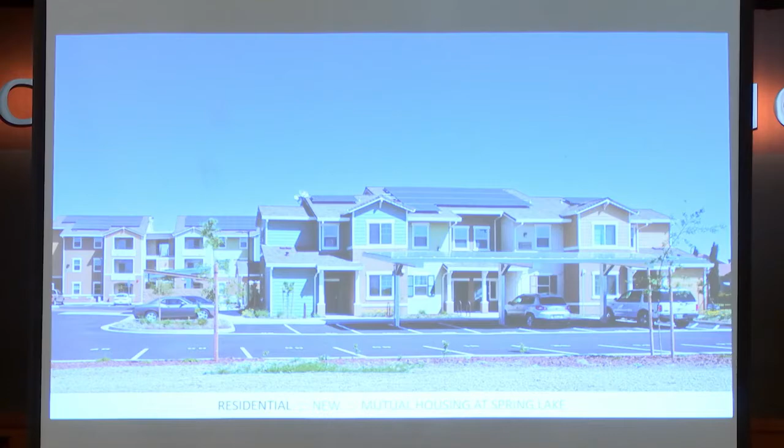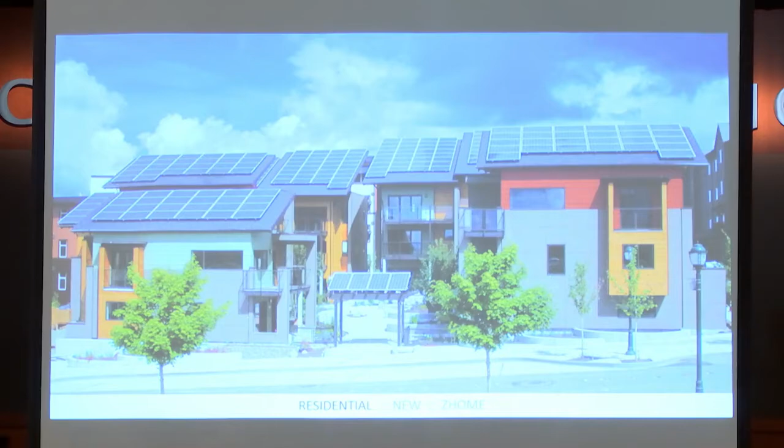So single-family residences. This is Southern California, multifamily. This is actually low-income housing, believe it or not. Wow. Right? So, it's doable. This is actually up in Washington, so they beat us on multifamily, and you know how cloudy it is there. This is it, believe it or not. So this is educational, Vancouver, Canada.

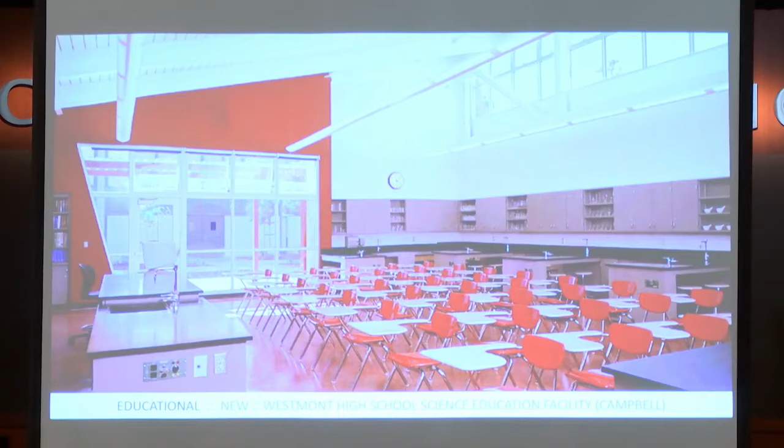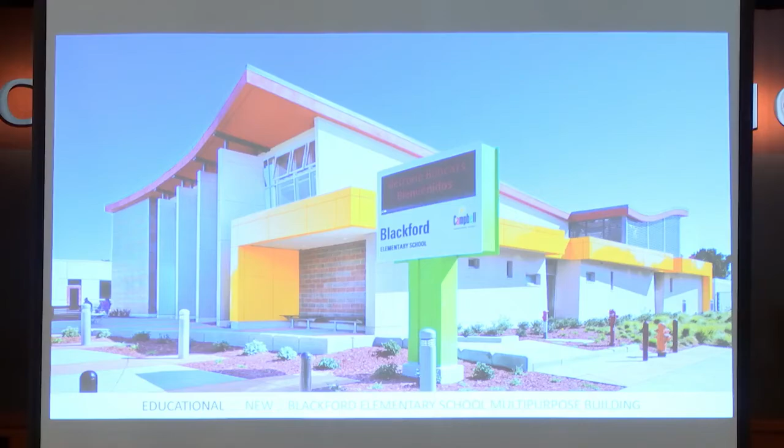This is, anybody from... Liz isn't here. So this is in Campbell, the high school science building in Campbell. Oakland, all educational, East San Jose. San Jose. Hey, San Jose's ahead of us. Got anything from Los Gatos? Do we have anything in Los Gatos? No, huh? No, but we'll be willing to design one for you.

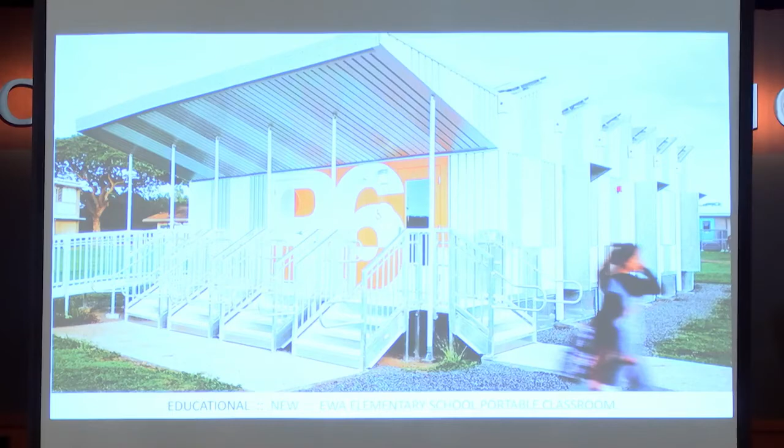Oakland Unified School District. Hawaii. This is up in Sonoma Academy. So a bunch of educational projects are zero energy. A lot's already been done. University, or I'm sorry, this is college. Stanford.

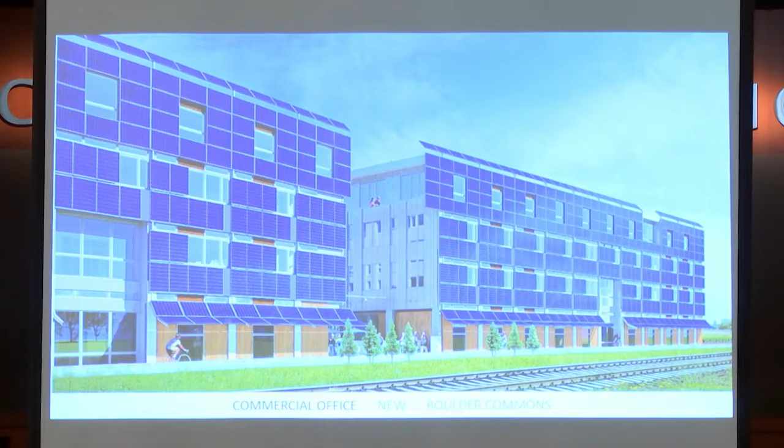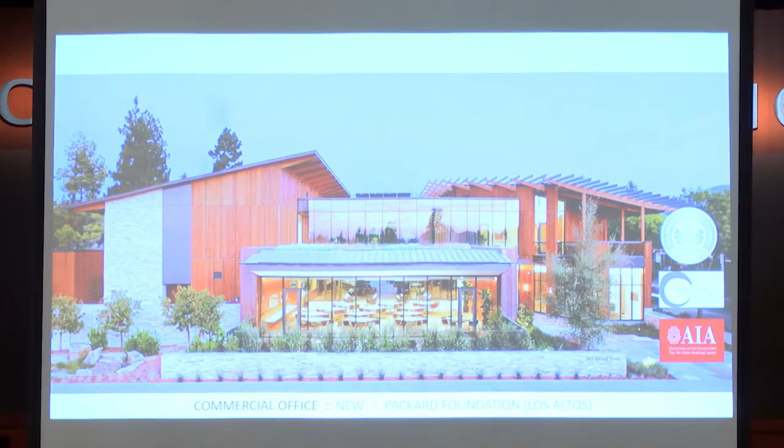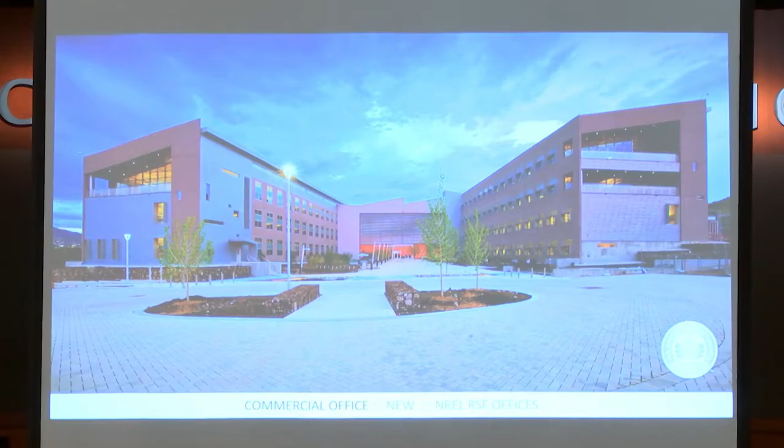Commercial offices, believe it or not, this one's not even in California, which has got good sun access. This is in Boulder, Colorado, which is much colder. This is one of John's projects. Packard Foundation, of course. This is in Los Altos on Second Street. This is another one of John's projects. This is the NREL facility in Golden, right? Golden, Colorado. So still the biggest? We think it's the biggest office building in the world that's net zero energy.

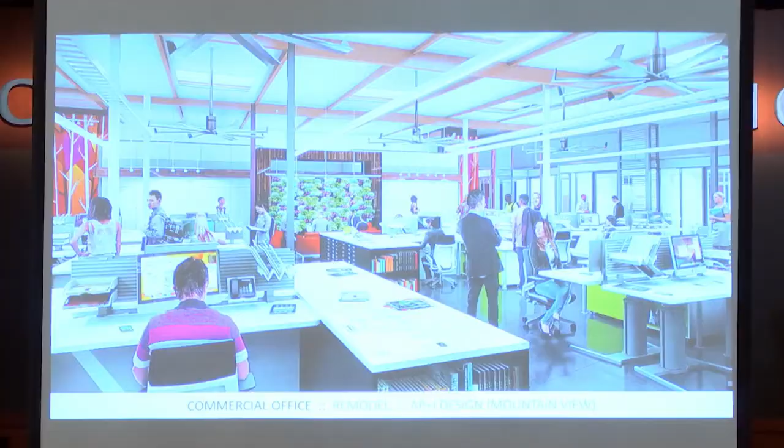I was just here. I just put this photograph in right before I came here because I took this about an hour and a half ago. This is Pastoria, also in Sunnyvale. So Sunnyvale is way ahead of all of us. We need to do something about that. This is the LinkedIn building in Sunnyvale.

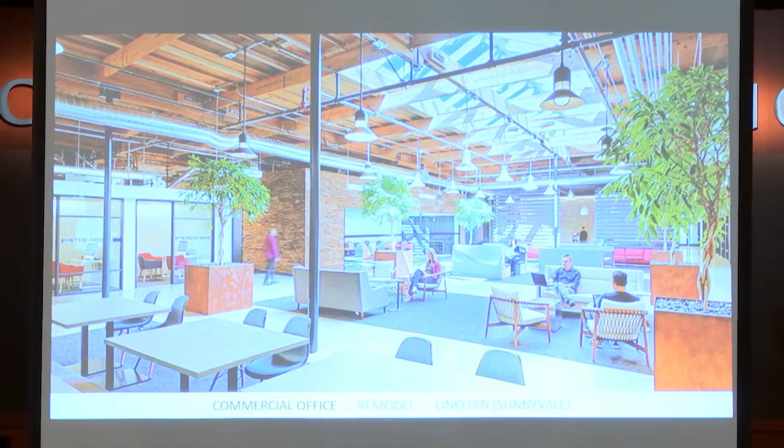That Pastoria one. Pastoria is right around the block. Yeah, I know. I saw the sign. They have a sign out front that says net zero energy. I took a picture of that too. Is somebody in the building right now? Actually, you said that. Can we say who's leasing it? Okay. Sorry, I can't say who's leasing. We think somebody's leasing it, but I don't know if it's been announced yet.

So, DPR Construction's office in San Francisco, and they've done a bunch of zero energy. All their offices, one by one, they're making them zero energy. So there's one in LA and one in Arizona, and I think one in Washington D.C.

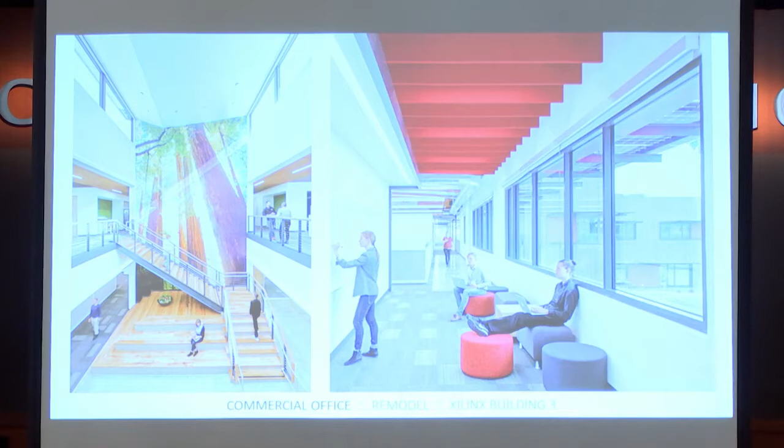This is Xilinx's campus, one of the buildings. It's a remodel. So actually, the other thing is about a third of these buildings are remodels. They're not all brand new construction. So it's not like you can only do this with new construction. A lot of these are old buildings that have been repurposed. This is a botanical garden up in Vancouver. Oh, there you go, Rod. This is Cupertino.

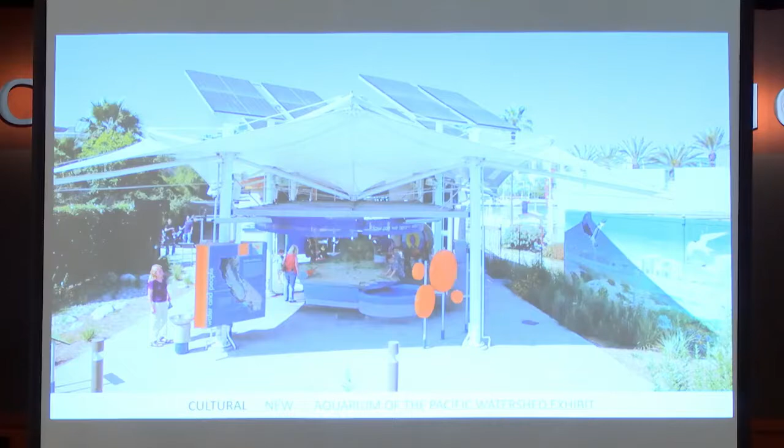McClellan Ranch. This is an exhibit at an aquarium down in Long Beach. The Yosemite Institute. The Exploratorium up in San Francisco, most of you probably know that. This is another one of John's projects.

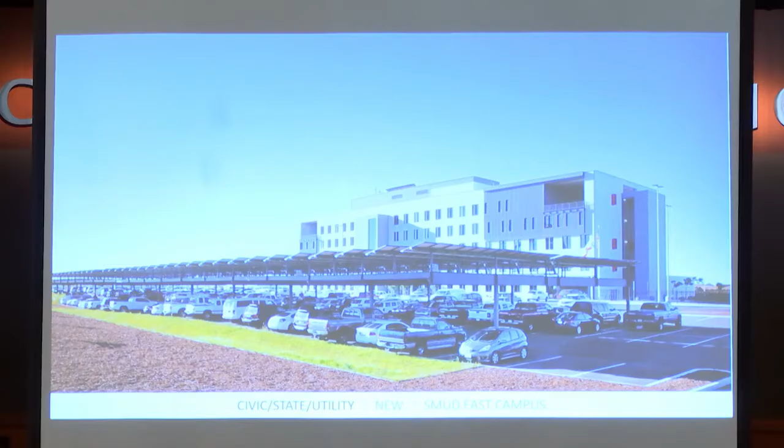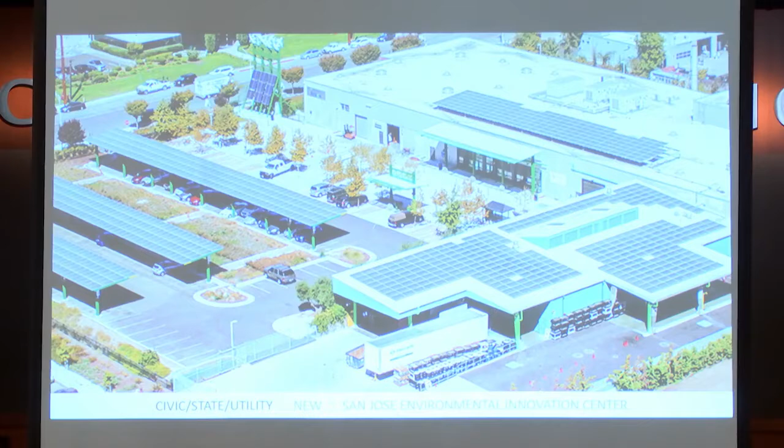This is the SMUD East Campus, I think it's called. Huge, the whole campus is net zero energy, not just that office building. So they have maintenance facilities and things like that. Watsonville. San Jose's Innovation Center. The water utility company in Denver.

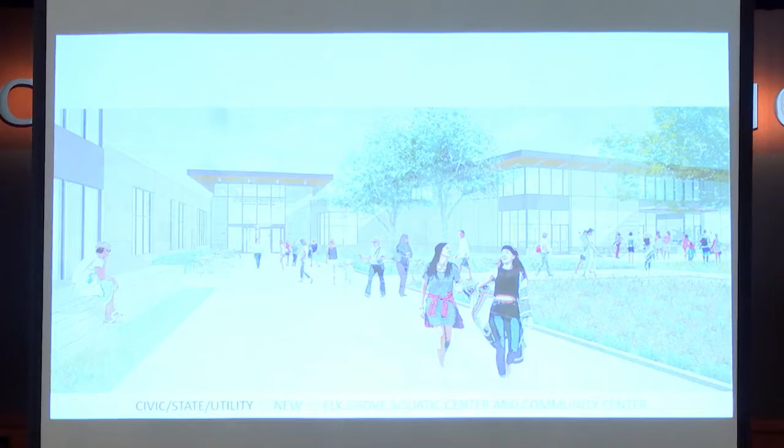Half Moon Bay Library, Elk Grove Aquatic Center up in Sacramento. Atherton's new Civic Center is going to be net zero energy. Hayward's building a library that's net zero energy. This one's really interesting. This is Santa Clara's aquatic center that they're going to redo, and we're actually talking to them about trying to do it as a microgrid so they could take that net zero energy, connect it to

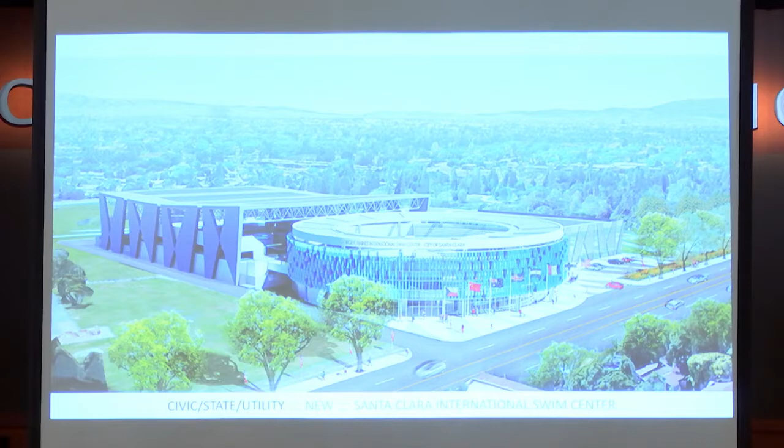a battery, and if there's an earthquake or something like that, they have water on the site, they have solar hot water so they can heat water, put up people, flush toilets, give them showers, and have electricity, recharge phones and things like that. So this is an area where a city could really take a leadership role and do something beyond just putting up another building.

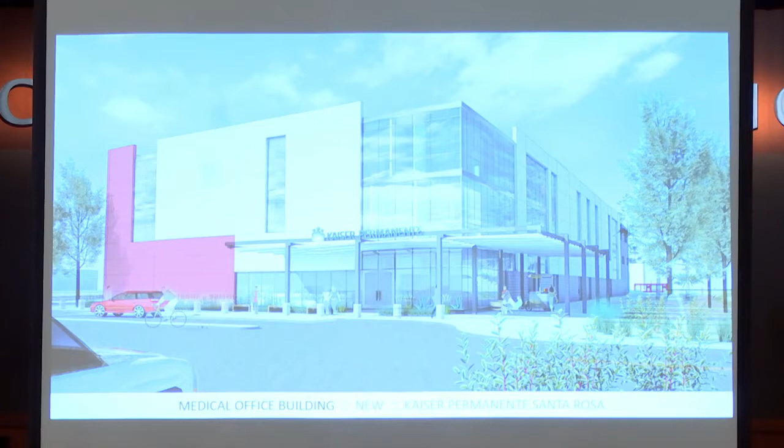And in this case, he managed to do it, how much, $1 million? He saved $1 million off of Kaiser Permanente's budget for just a regular office building, and it's going to be net zero, right? So that tells you something. Everybody thinks you can't afford to do this, it's too expensive. There's ways of doing it. This is in San Leandro, a training center for electricians.

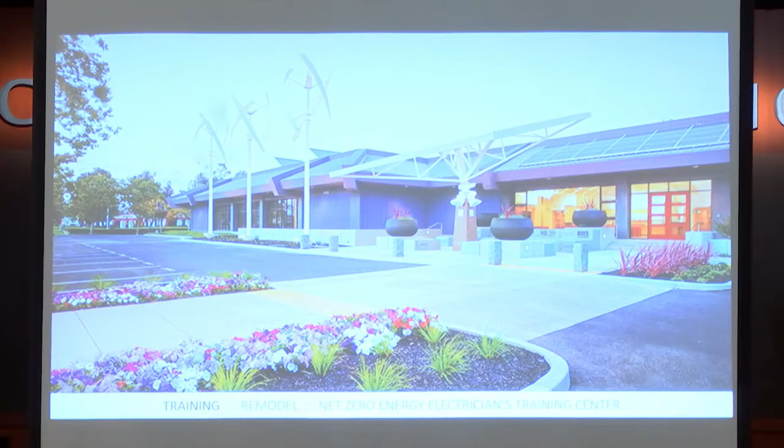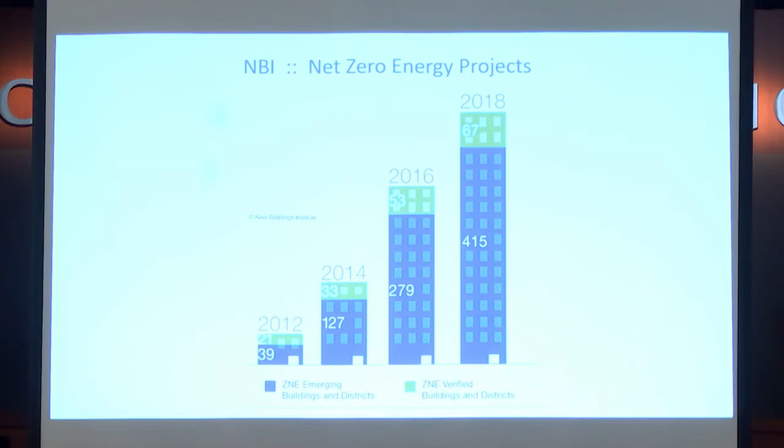So anyway, a lot of work, hundreds of buildings now. There's now a group that's tracking zero energy projects; you can see the growth year on year. And so the one I wanted to talk about was this Indio project in Sunnyvale, just to give you a couple of interesting facts about it. So the developer actually spoke last week at the What's for Lunch meeting that you guys hosted.

It's a long story that I won't get into, but this guy's a for-profit developer. He's not doing this just to save the world. He's a good guy and all, but he wanted to make money while he's doing it. And so we went through this long process to figure out how to do this cost effectively. And he thought he could do it, and he built it and tried it out. And this is his numbers based on the actual costs that he incurred.

So that was what he was expecting to spend if he did a renovation on this existing building. That's what he actually spent. So he gave us, what was it, $48.73 a square foot extra, something like that, to do this project. And he said, if you could do that, we should be able to make it pencil.

Then when he did his calculations, he figured out that he made $2 million more than he would have made otherwise. And that's after you put in those additional costs. So it cost him an extra $1.5 million, but he paid off that $1.5 million extra, and he made $2 million in addition, according to his calculations, using a 7.5% cap rate, which is finance stuff, not engineering. Evidently that's a reasonably conservative cap rate for this neighborhood.

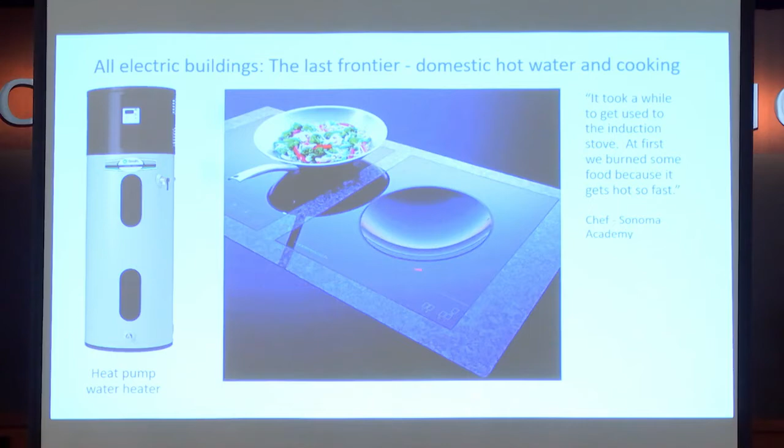We have this brand of, I don't know if you recognize what that is, but that's an induction wok burner. So it's specially made so that the wok fits exactly into that dimple. So when we built our house, I did a search under induction wok cookers, and two manufacturers came up. So I asked my wife to go try it out. She went to the first one, Gaggenau, called me up at lunchtime, said it's crap. I'm not having it in my house, forget it.

And I'm like, oh, jeez. So I was like, okay, let's check the other one out just in case, maybe it'll be better. So that weekend we went to the other one, which is this one, which is Kuppersbusch. The guy gave the demonstration, put water in it, started boiling within 10 seconds or something. And invited her to come back on Monday with some vegetables and try it out. So she decided to do it.

But the thing that he then said that was the clincher was, as we were walking out, he said, a lot of these Chinese, my wife's Chinese, a lot of these Chinese families really like this, because what people do is they get an old towel and put it over the burner and put the wok on top of it. And then when they're done cooking, they just take the towel and throw it in the wash because it catches all the spatter. And as we were walking out, she goes, if this works, we're getting it. And it worked.

So, and they're really fast. My kids complain about using a gas-fired stove because they say my sister, Aunt Kathy's gas stove is like so slow, it's really irritating.

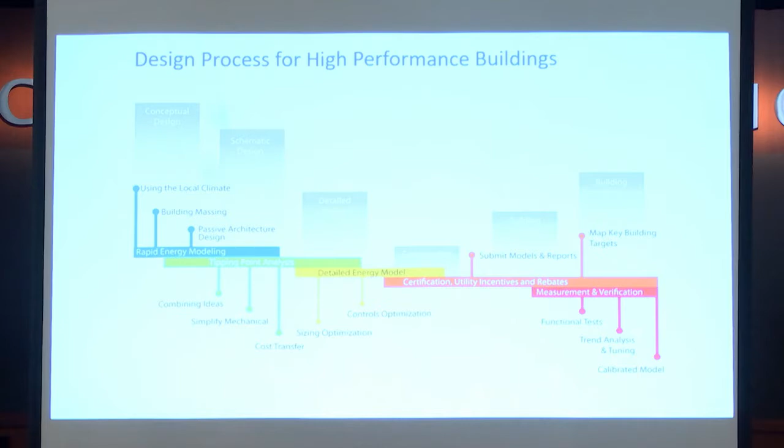The most important piece is early on in the design. This is from beginning to end of the project. So in conceptual design and schematic design, when you're trying to figure out what the building shape's going to be, the very basic stuff, then we need to be talking to the engineers.

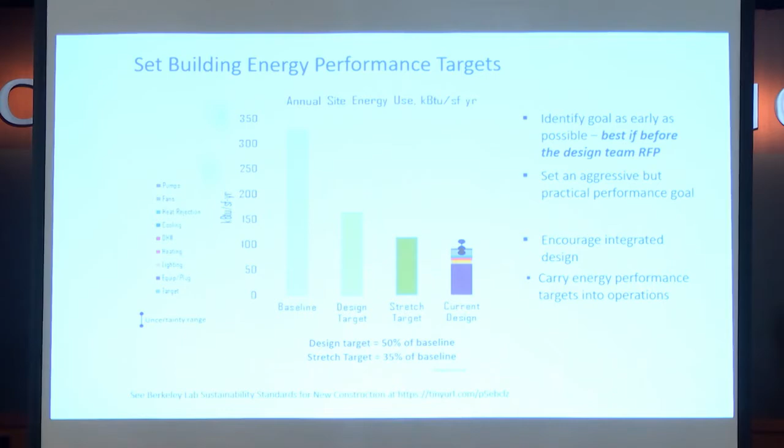It's really important to pick an energy target, how much energy you're going to try to have the building use, early on. That's pretty aggressive because that becomes the discipline that you use to make sure that you're going to be as efficient as you want to be. If you don't do that, then it's really easy for things to get out of control and suddenly the building's not efficient.

So this is a typical project that we would do where we set a pretty aggressive target, and then as we start looking at systems, our team will do really quick, they call them shoebox models, so we'll look at a shape of a building or an amount of glass or levels of insulation and quickly model it to look at how much energy it uses and figure out which ones use less energy, and then we could also look at which ones use less energy and aren't too expensive, and try to marry those two together.

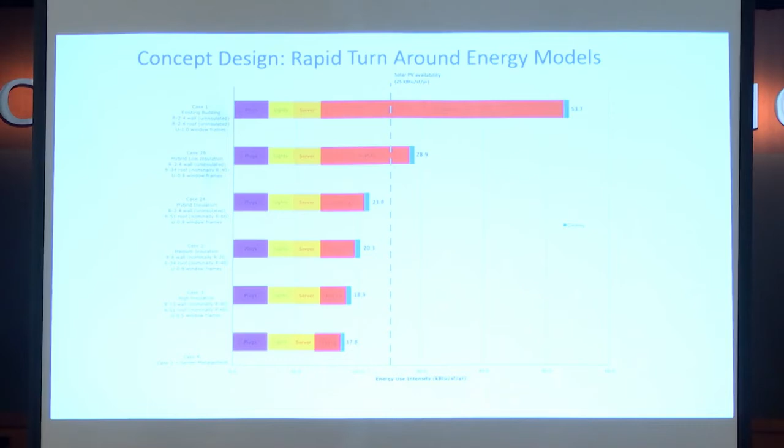And as we're doing it, we're constantly going back and looking at costs because otherwise you end up doing something that's fabulous but costs a fortune and you can't afford to do it. And there's just five areas that you need to look at. It's pretty simple. So the first one is the skin of the building. So that's the windows and the walls, basically, and the roof. And how much insulation, what color, what materials, how much glass, things like that.

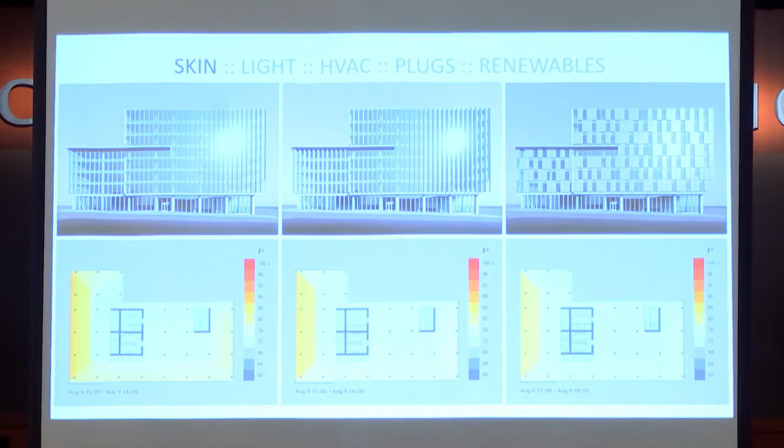So this is just a typical building that we were looking at, that our daylighting person was looking at, how much light, and then our energy modelers are looking at what's the impact on the air conditioning and heating systems.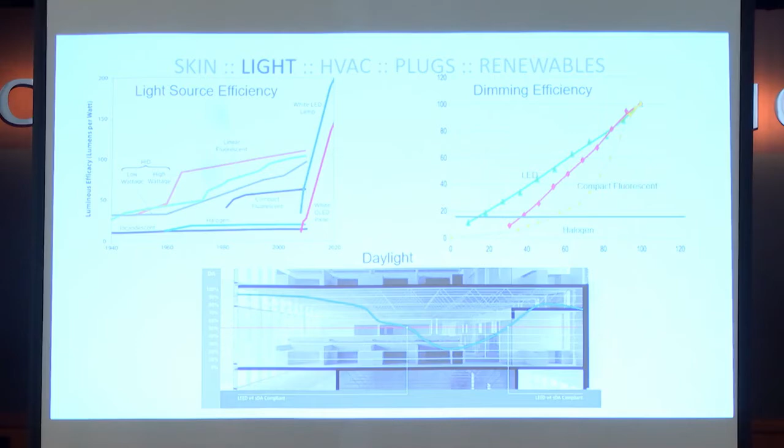Daylighting is a huge thing, so being able to use daylight in your building to reduce your need for electric light is a big issue, even though nowadays electric light's gotten much more efficient. So, using LEDs is important. Dimming those LEDs if you have daylight in the space is really important.

But we've done projects where, compared to the average US office building, we've had the lighting budget come in at maybe 8% of what a normal building uses, believe it or not. So, especially in an office building, it's not only used, but primarily used during the day. So if you have good daylighting, you can just have the lights off all day long, and you're using practically nothing.

Air conditioning systems, and John can talk to this more if you have questions about it, but there's hundreds of ways that you can do them. Sometimes we find out that the cheap, less efficient ways, if you do them in a smart way, are fine. So a lot of times it's just trying to keep things very simple and easy to control.

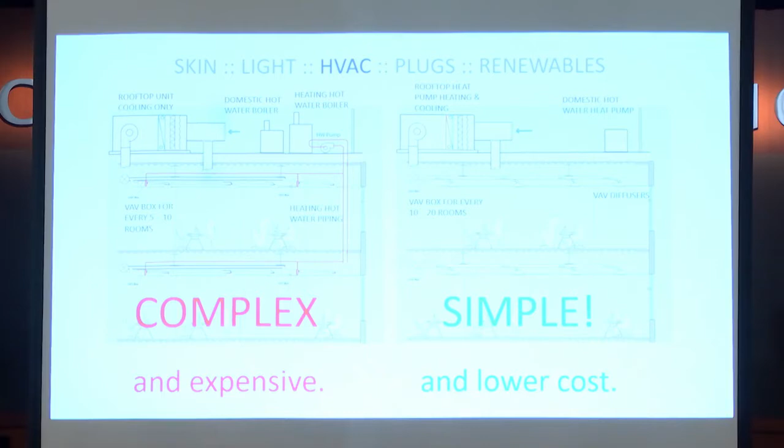And then something that's new that we started looking at when we did our first building and then really got into in a deep way on the Packard Foundation. This is an example of where these really stellar projects help to break new ground: the first time ever I got paid to do what we call a plug load study was for the Packard Foundation. And this is the results of that study. So we helped them look at their plug-in equipment.

And the idea was that if they didn't reduce that energy use in their plug-in equipment, we had to buy photovoltaics to offset that. And that was back when, instead of $2.50 a watt, it was like $9 a watt. So it was hundreds of thousands of dollars if we couldn't reduce the energy use of their plug-in equipment. So we did this study and came up with recommendations on just buying more efficient equipment and things like that, that would reduce the plug load use over 50%. And we've done that with Google and Microsoft and a lot of companies.

And if you're smart about it, there's quite a bit of energy savings that you can capture. And residences are some of the same things. You'd be amazed. In the old days when they were using, what were those things called, TiVo? One of my engineers took a meter home and put it on his TiVo, and it was using like 110 watts 24 hours a day, right? And a couple years ago, I took my DVR, same thing. They're more efficient, it was down to like 30 watts or something. But when I turned it off, it was like 25 watts in the off position. So it was just sucking energy anyway.

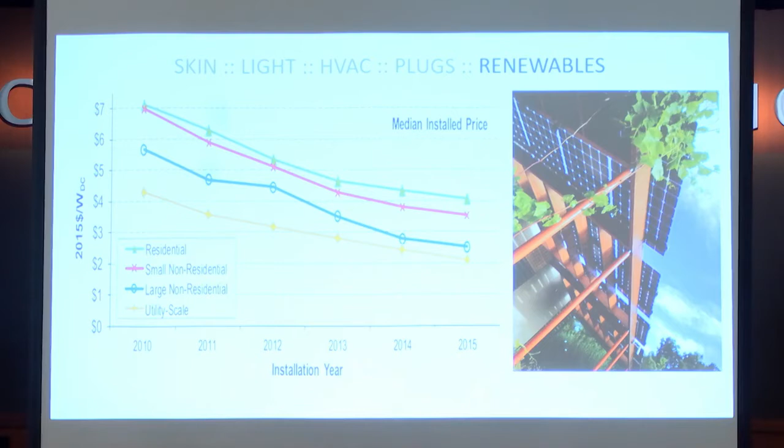And then the last thing is you put renewables in to offset the energy use. Although renewables have come down so much in price, it used to be that you minimized your energy use and then you bought renewables like photovoltaics. That's not always the case anymore. There's some cases where we're finding it's just cheaper to use the less efficient equipment and just put in more photovoltaics. In the old days, it was so expensive that it was a no-brainer. You did all the energy efficiency measures first. Now, most of the time, that's still true, but not always.

Oops, sorry, wrong way.

And then once you do that, it's just a matter of sizing your renewable energy system, which is that blue line, so the area under the curve matches the energy use of the building. And that's how you net to zero.

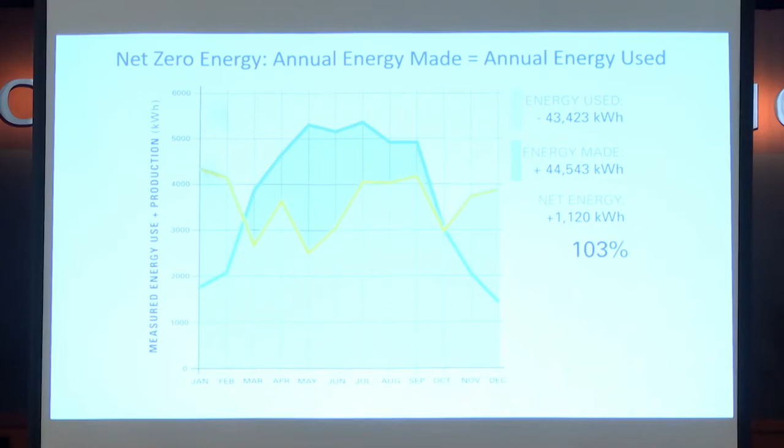And one thing that a lot of people do is called a power purchase agreement, where you hire somebody to come out, put the PVs in, own them, maintain them, and sell you the energy. And nowadays on a larger project, somebody will come in and do that for you, and you're buying the energy at the same price or less than you would get it from the utility company anyway, and the rates are locked in. Either they'll stay flat or they'll go up slightly, but you know exactly what they're going to be for the next 15 years.

So the last thing I want to talk about is some of the things that we're thinking about, and maybe you might want to be thinking about, what's coming up in the future. So one of the big issues is carbon, right? And the whole issue with carbon is global warming, actually, right?

So I wanted to show these slides. This graphically explains how net zero energy works on a building. This is actually a project that we're looking at, the predicted energy use for a building, right? And I got one of my guys that was running the photovoltaic calcs to do a calc of how much PV they would need to offset the energy use of the building. So this is what he came up with.

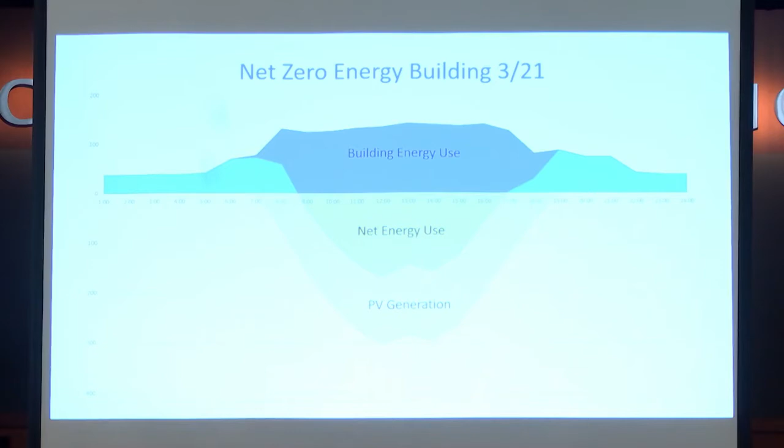So at night, you're using energy, and then in the morning, as the PV starts kicking in, you start pushing the energy back onto the grid, which is what net zero is, and net metering is you're pushing the excess back onto the grid. So can you stop just for one second? Sure. Because we're all thinking it. We know that this doesn't work anymore. That's right. So that's what I was getting to. That spins the meter backwards, right? So this is the utility. This is what I was getting to.

So this is actual data I pulled off the net for April 3rd. I was just working on the presentation on April 3rd. So that's what the grid was seeing in California. But some days, if it's a really sunny day, you get additional renewables or photovoltaics, and theoretically, you can get that happening, right? So in a building, if that happens, it's net metering, you push it back onto the grid, right?

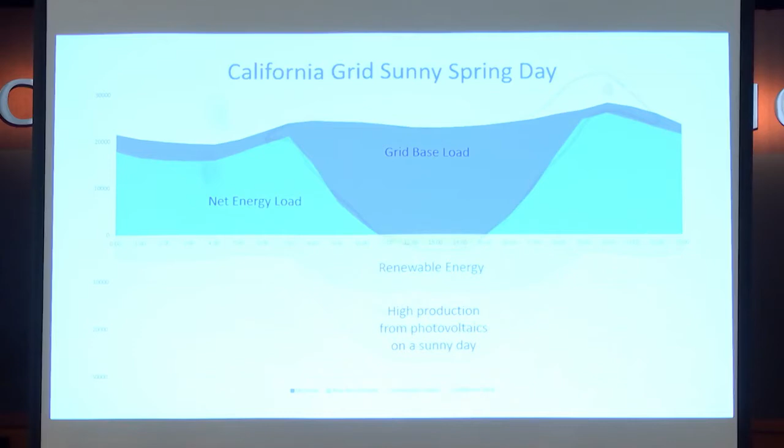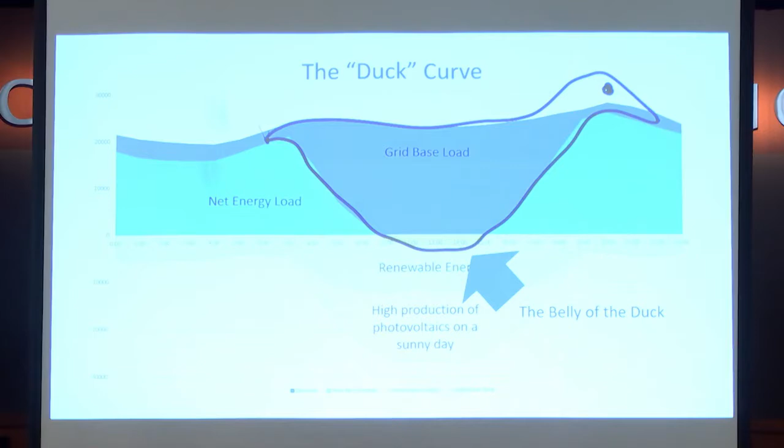In the grid, if that happens, that's the duck curve, right? Everybody's heard of the duck curve, right? So if that happens, in theory, you can crash the grid, right? So you guys know that this happened, right? There actually were days that California had to pay Arizona to take excess energy because we couldn't use it, and you can't just make it go away.

So this is a problem now in California. It's a problem in Hawaii. It's a problem, believe it or not, in Washington because of hydro, so they have the problem this spring when the snow's melting. So the way California solves it is they're paying Arizona to take the energy. I don't know how much they paid, but it was negative pricing. In Hawaii, what they've been doing is if you put a big installation in, they have the right to shut you off if they can't use the power. So that's another way you can do it.

The other way that everybody's starting to play around with, and I'm sure you guys are thinking about this, is putting battery storage in and then shifting that energy use into the evening. So I think that's the big thing that is being discussed a lot. A lot of our clients are now asking about battery storage.

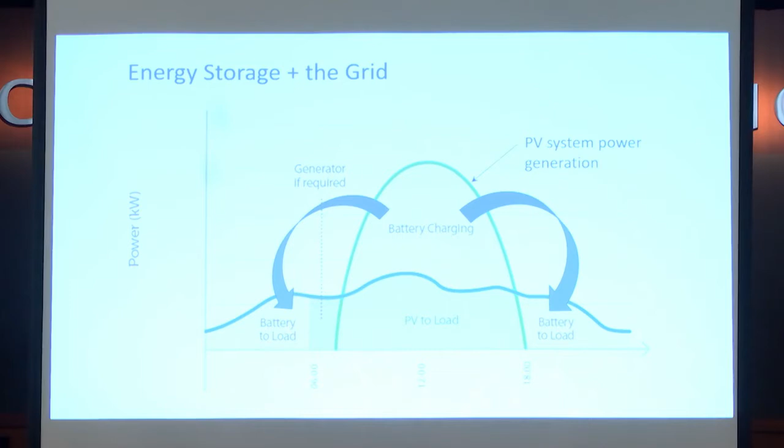Tesla told me that the biggest market by far for Tesla Powerwalls, the residential scale ones, is in Hawaii because everybody's pissed off that they have to turn their PV off. So instead of turning it off, they're putting in batteries so they can store the energy so they don't throw it away. Has anybody heard of this program, WattTime?

So there's this really interesting piece of software that was developed. The company, WattTime, is actually in Oakland, but they developed this software with Microsoft and RMI, Rocky Mountain Institute. And what it's meant to do is track real-time carbon on the grid. And so Microsoft's playing around with it, trying to use it to actually,

instead of being, we talk about zero energy, but it's actually net zero energy, right? So at night we're pulling from the grid, during the day we're pushing off the grid. This is actually to allow you to see if you're true zero carbon, right? So on a 5-minute basis, they're tracking the carbon content of electricity on the grid. And then what they can do is provide signals to buildings to then adjust their energy usage based on how much carbon's on the grid if you want to do that.

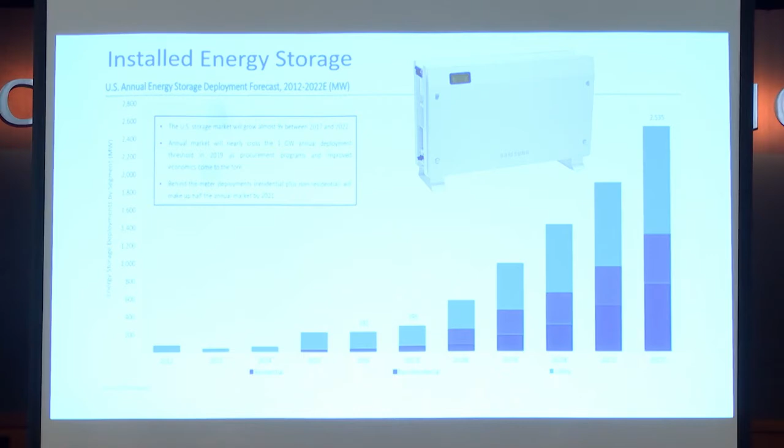So that's something really interesting that we're actually talking to some of the high-tech companies about, because they actually have requirements in place and goals to be true zero carbon. Right? Batteries are coming down in price, which is a huge thing. And battery installations are going up rapidly. Utility companies are putting them. Don was saying that you're involved in some purchasing power that's got storage attached to it. I know PG&E is working on it also.

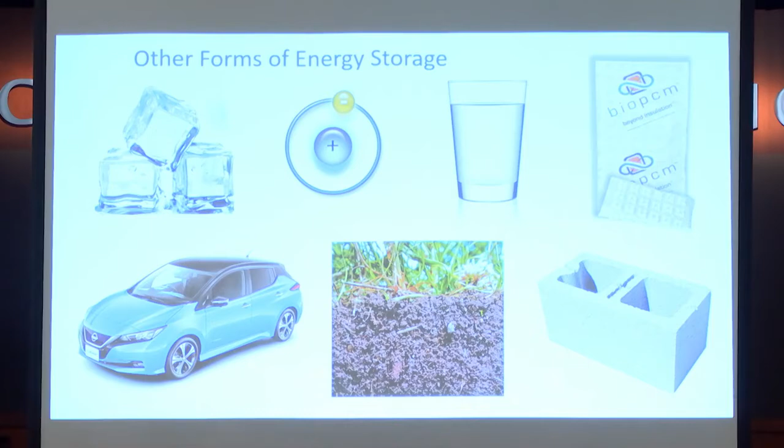But one of the other things to think about is energy storage comes in many different forms, so it's not just batteries that could possibly help solve this problem, right? So especially in buildings, you know, a lot of those projects that we did in Sunnyvale, we're using thermal mass to reduce the energy use. So what they're doing is at night, they open up the skylights, crack open the windows a little bit, and cool air flows in, cools down the mass of the building. They insulated the outside of the building, so once that mass is cooled down, then when people come in the next day, the building stays cool.

So a month after they moved in, the temperature went up to 93 degrees for a week, even though it was like October or something like that. The air conditioner never went on, right? So if you design a building well and kind of use some of these things like thermal mass, we're doing another project where we're looking at in the summer, this sounds crazy, but using like thermal hot water and piping it into the ground. Not dumping the water into the ground, but putting like loops of pipes in the ground. So what you end up doing is making the ground hot.

And you do that all summer long, and then in the winter you use a ground source heat pump to pull the heat out of the ground and use it for either heating buildings or heating swimming pools, things like that. So the ground could be a battery, right? A car can be used as a battery. Somebody told me that I think it's Nissan has got a system that they're selling in Japan but not here, where you can use your car as a backup battery for your house. You know, concrete can be a battery. Like India, we're using the concrete floor as a battery.

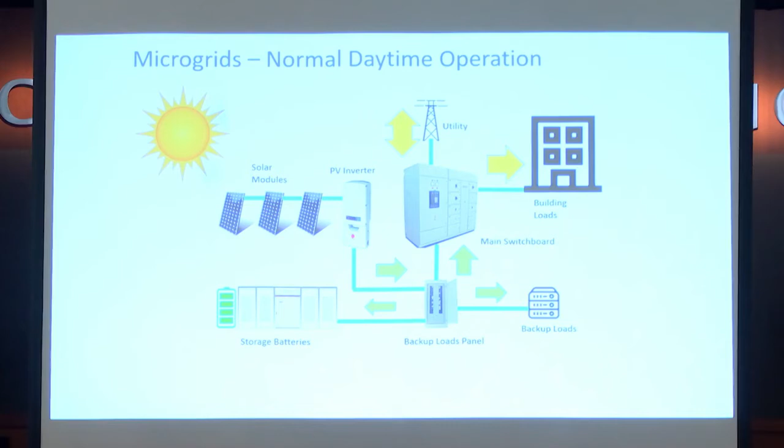And then, you know, we're starting to see, if you're going to put batteries in, then the obvious thing to do is do something called a microgrid, where you tie your battery and your photovoltaics together, and if the power goes out, you could actually run your building even though the rest of the grid's out. So something like that. And we're doing at least 4 or 5 projects right now? 6 projects that we're looking at microgrids, including the Atherton Civic Center project.

It was assuming that there were going to be a future 800 car charging stations, and it was a 2,000 amp 480 volt service just for that they had to leave space for. That was like half again as much as the energy use of the entire high-rise residential project. So it's a huge amount of potential energy that could possibly end up hitting our grid.

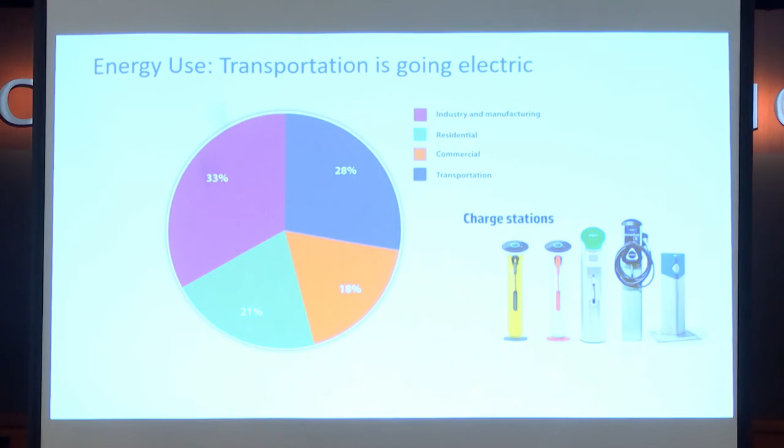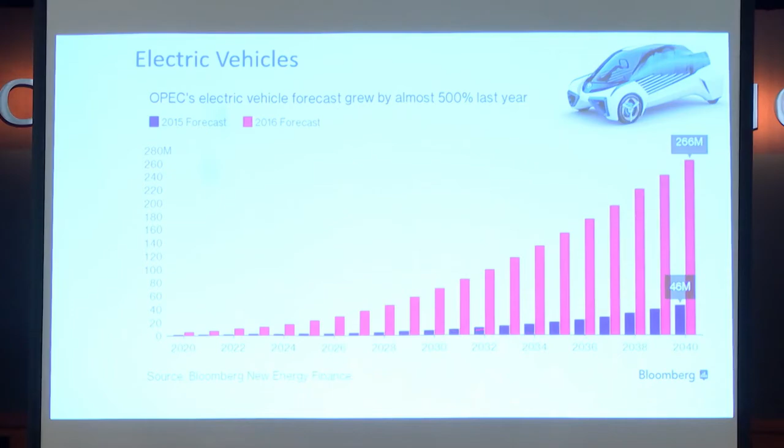And the estimates for how quickly EVs are rolling out are changing radically. So this graph shows kind of the 2015 forecast, and then in 2016 they changed the forecast to increase the numbers 500%. So things are happening faster than they originally anticipated.

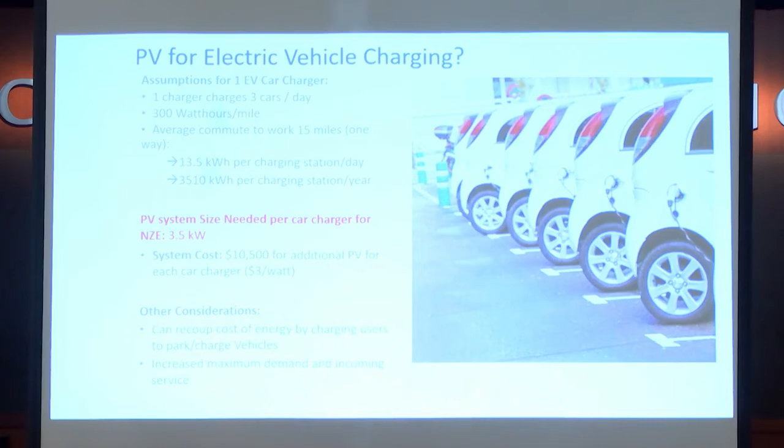And this is a calculation one of my team members did to kind of estimate how much PV you would need to charge a car. He was assuming you could charge 3 cars a day. This is like at an office park. You would need about a 3.5 kW PV system just to supply 1 car charging station.

And then the last thing is autonomous vehicles. So, you could say that autonomous vehicles are going to use the same amount of energy. It doesn't matter if there's somebody in them or not, or somebody driving them or not. But the thing that I didn't realize is that what's anticipated is as autonomous vehicles become more and more common, one of the net effects is that it's not such a big issue to live far from your work, because you're not wasting time just sitting there with your hands on the steering wheel.

You could be working or sleeping or watching a movie or doing whatever, and so it'll make it easier for people to live further away from their offices or their places of work. And so there'll actually potentially be a lot more vehicle miles traveled and a lot more energy used by autonomous vehicles.

And then the last thing that we're seeing a lot of: Fremont has been doing some really interesting things at the city level, looking at kind of smart cities. I don't know if any of the cities in Santa Clara are looking at that, but kind of data collection and use in cities. So this kind of smart buildings and smart cities is becoming an interesting phenomenon, and it's really, really early days, so it's hard for me to say this is going to happen and that's going to happen, but the amount of buzz and the amount of change I've seen in the last 6 or 8 months is pretty amazing, and a lot of it's coming from the Bay Area, because a lot of the innovation's coming from the high-tech industry.

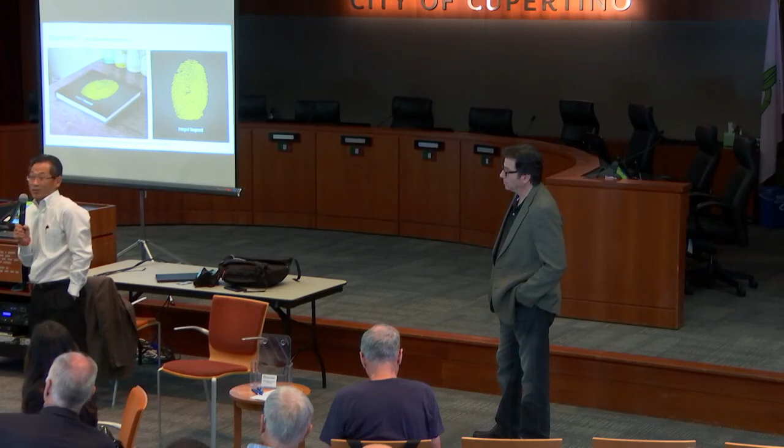But if you're going to do that, then the people that are putting in those systems need to understand that's going to be the deal, because if you put a system in understanding that you're going to be able to sell back all the extra power and some that you can't, that's a little bit unfair, right? With the cost effectiveness of renewables, a certain amount of that might be acceptable to a company that's investing in a PV field somewhere. So it's not necessarily that we're at the point where we shouldn't be putting in any more renewables. I think the rules are going to have to change a little bit.

Otherwise, you're going to bankrupt PG&E again, right? Because right now they're buying the energy at retail rates, right? And then you're going to be forced to pay somebody else to use the energy that you just bought. That's ridiculous, right?

Thank you for the presentation. I thought it was great.

Thanks. Has the definition of net zero energy buildings changed? Because it seems like I've read about buildings that were labeled net zero energy, but they excluded the gas or something like that. There's a lot of different definitions, so yeah. Is there one that's defined by the state? Is the state using TDV? California has their own special definition. It's different than the federal government. We had to change all our marketing materials for that one, because that's how California labels it. And that's what they're going to call this, 2020 for the homes and 2030 for commercial buildings.